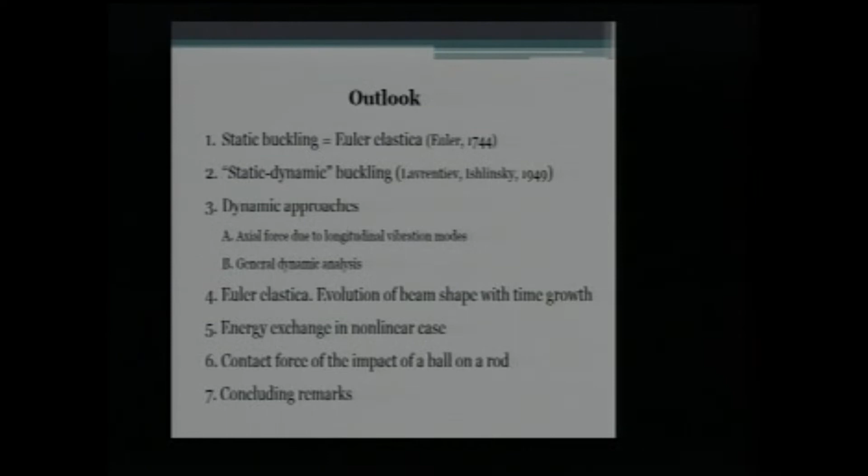I will begin with a classical problem, just to say a few words about the static buckling. Then I will come to the dynamic problem - first of all, the so-called semi-dynamic buckling or static dynamic buckling, and then I will suggest a number of dynamic approaches. What I'm going to report is just a classical, theoretical problem, without any practical application.

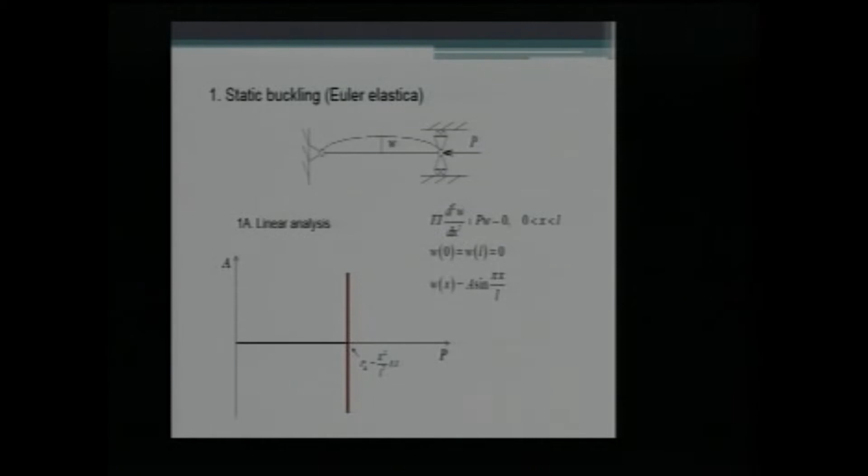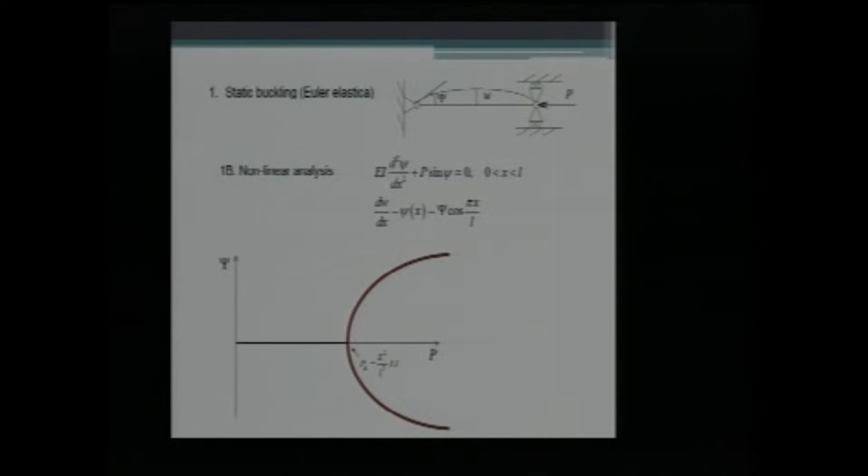This statical problem is well known, I think, to everybody. In the framework of the linear analysis, we have such a boundary value problem, and the solution has such a form, and the amplitude can be any amplitude - a shortcoming of this approach. The nonlinear approach is much more realistic, because at least for each axial force, considering a simply supported beam, we will have the amplitude and the buckling shape.

Also well known is the problem of the pre-curved rod, where W0 means an initial curvature, and we will have topologically another stable branches, but nevertheless everything is well known here.

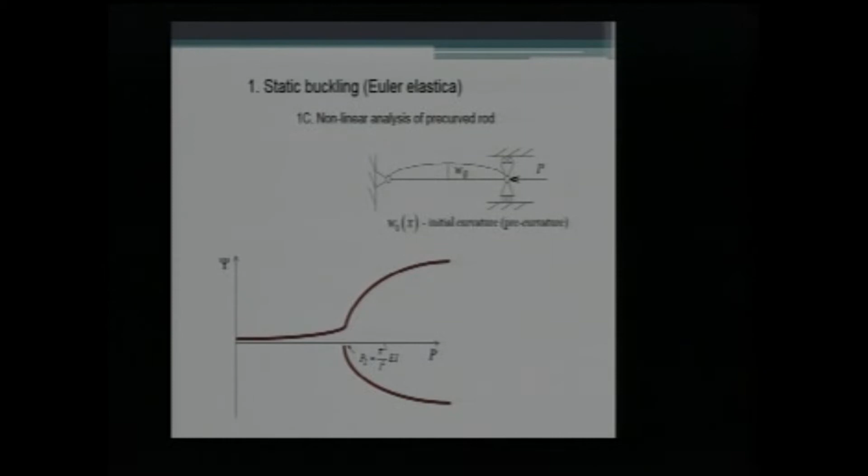What is probably less known is the attempt made in the late 40s by two members of the Russian Academy of Sciences, Lavrentiev and Ishlinsky, who suggested the so-called static dynamic buckling of the pre-curved rod. The rod is pre-curved, and the idea is the force is suddenly applied, and we keep this force - this axial force is the same in all cross sections, which is typical for statics. We apply the static force in axial direction, then study the dynamic motion of this rod in the transverse direction.

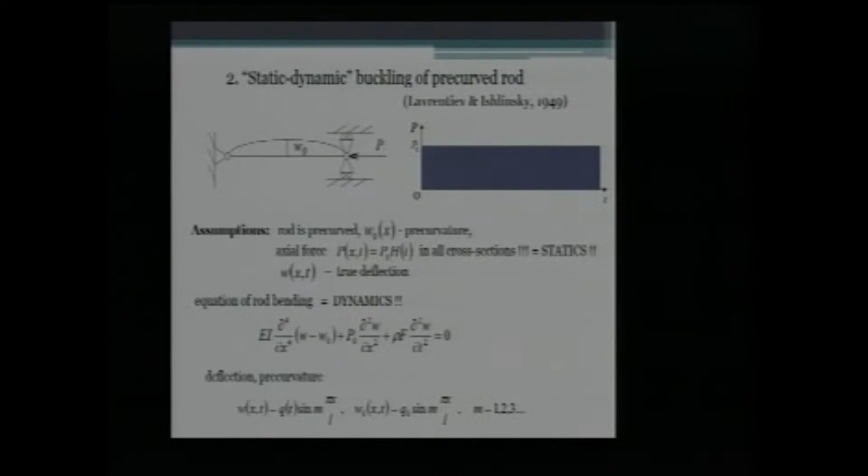So it's static in axial direction and dynamic in transverse direction. If we consider the vibration mode or buckling mode number M, and the deflection solution also in shape number M, then instead of the partial differential equation we will have an ordinary differential equation. If we introduce this lambda, and if lambda is a real value, then we will have two exponential functions, and this function describes the unbounded solution.

There is a number of buckling shapes or vibrations - number 1, number 2, number 3, and so on. Among all these eigenvalues, there is one which is maximum - the maximum eigenvalue. This maximum eigenvalue describes the solution which increases with a maximal instability rate. If we calculate this derivative and determine the maximum of this lambda, we obtain the result that m and n don't coincide. It means if we apply the critical force, the Euler critical force number n, then not the n buckling shape will have the maximum rate, but another buckling shape, number m.

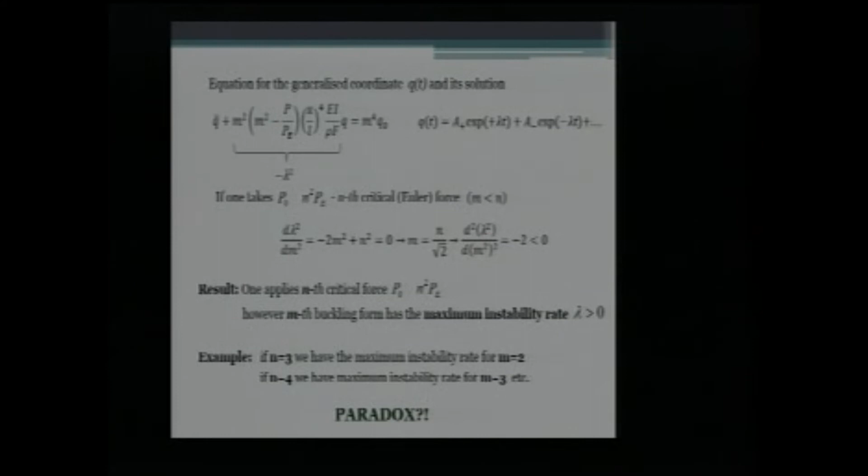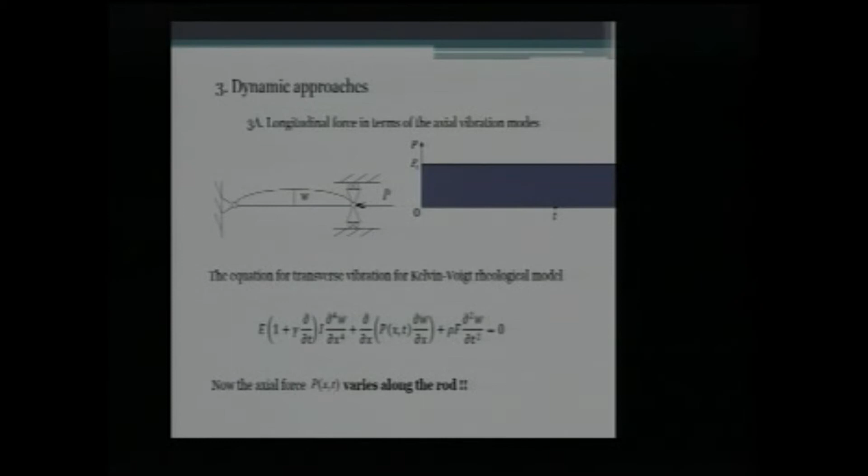So the first step is quite reasonable: to consider the dynamics not only in transverse direction, but also in axial direction. Everybody understands that the wave will propagate in the axial direction, but we applied the Kelvin-Voigt rheological model to take into account the damping. This axial force depends not only on position, but also on time. We will not use the approach of wave propagation, but can expand the solution in terms of the axial vibration mode because of the dual possibility.

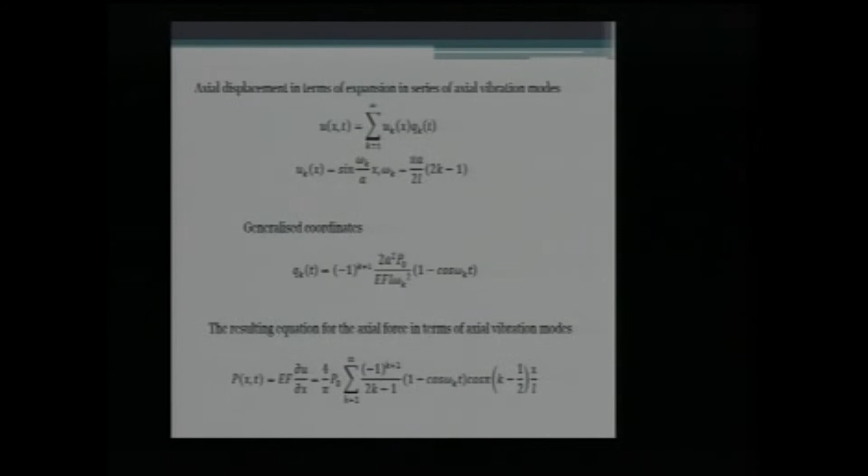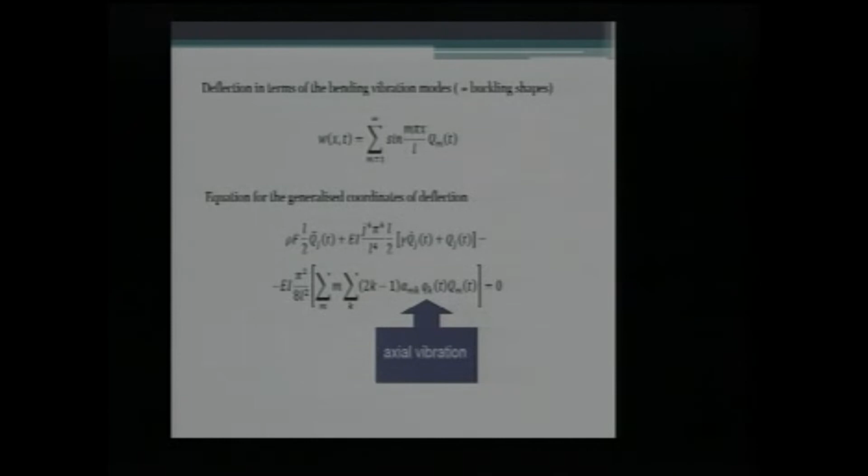It's a very simple problem, easily solved, and we obtain the axial force, which of course will depend on time - it will be a number of harmonic motions. Then we substitute, looking for the solution in terms of the bending mode, also instability shape, and we obtain the generalized ordinary differential equation for the generalized coordinates. The very fact that we have generalized coordinates for the axial vibration leads to this ordinary differential equation, and here you can see the term which is time dependent - namely the periodic or harmonic motion.

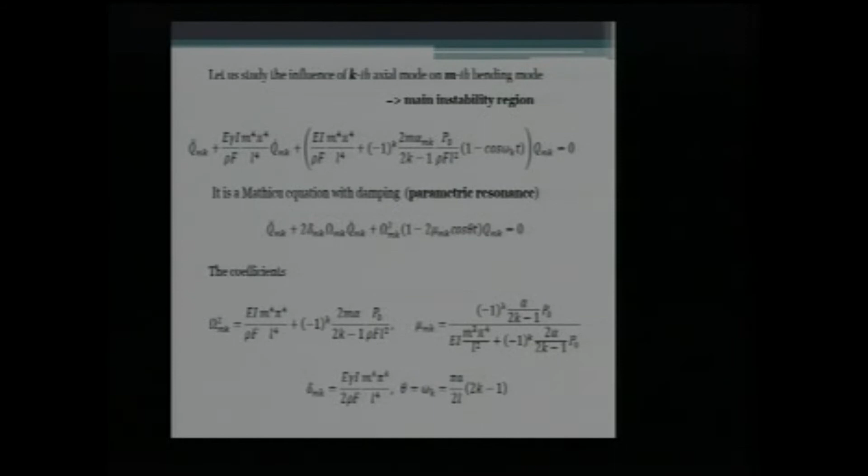So it's a kind of Mathieu equation, and if we consider just the main instability region - because there is a mixture of all these parameters, and all these coefficients are presented here, for example in these eigenfrequencies there is a part from bending and also a part from the axial force - it can be easily solved, and we obtain the instability region. But the result is disappointing, I would say. For example, we see that the first longitudinal mode excites just the instability region number 12 of the bending instability, which is certainly not realistic.

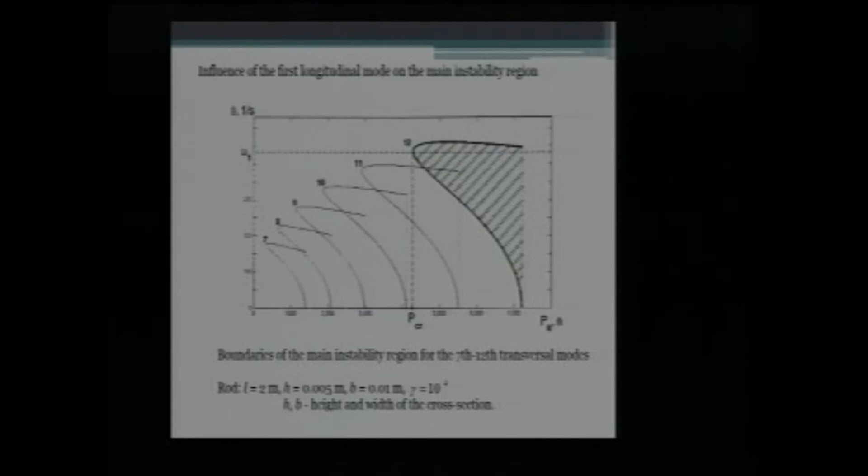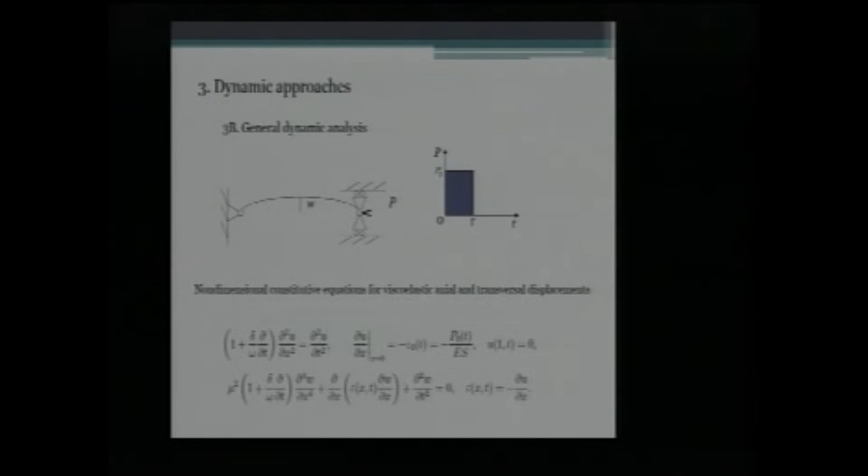With this in view, we make the next step and consider the general analysis. We assume this axial force acts for just a finite time duration, and the solution - I will skip all these calculations, but the final result you can see here. The solution looks like this.

This alpha m actually describes, as you see, corresponds to the buckling shape number m, and this is responsible for the instability. A number of these exponential functions are excited: number 1, number 2, number 3, number 4.

For example, if we take the fourth Euler force, Euler load, critical load, you can see we will have such a line. Generally speaking, the first, the second, and even the fourth will be excited, but shape number 3 has a maximum instability rate because it corresponds to the maximum value of this alpha.

It's a paradoxical situation probably, but you see, if we move slightly to the right, then we will deal with number 4, and if we move to the left, then the second will be prevailing, let's say, in such a way.

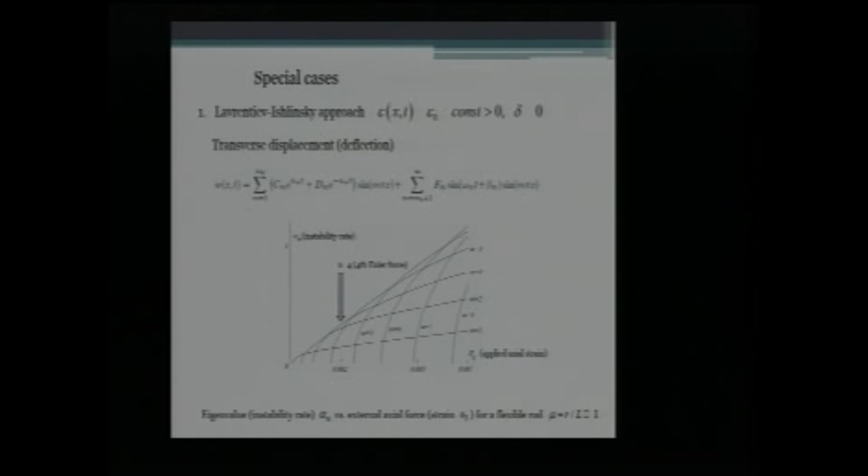So it's the next calculation - let me also skip this calculation. If we obtain the complete picture, what I mean by complete is that it will be some curves which correspond to the exponential instability and also some parametric instability.

So you will see that the amplitude growth, or instability rate, whatever you like, at the Euler bifurcation is always greater than growth at the parametric resonance because they are lower in this picture. So parametric resonance is probably not so dangerous.

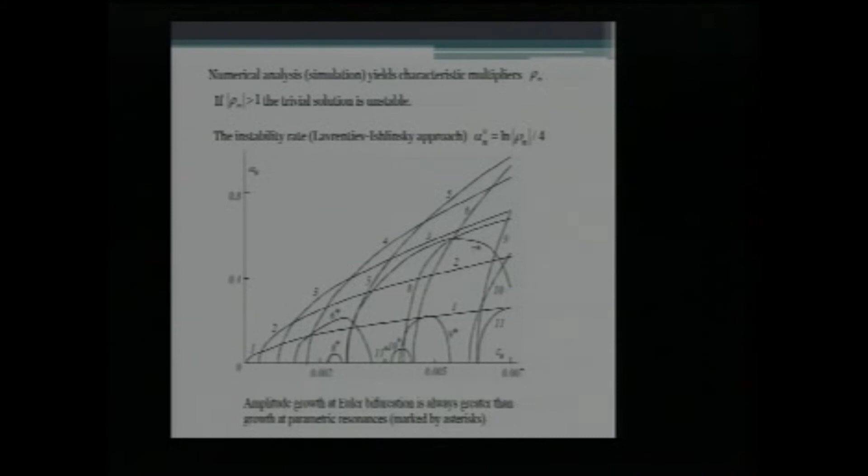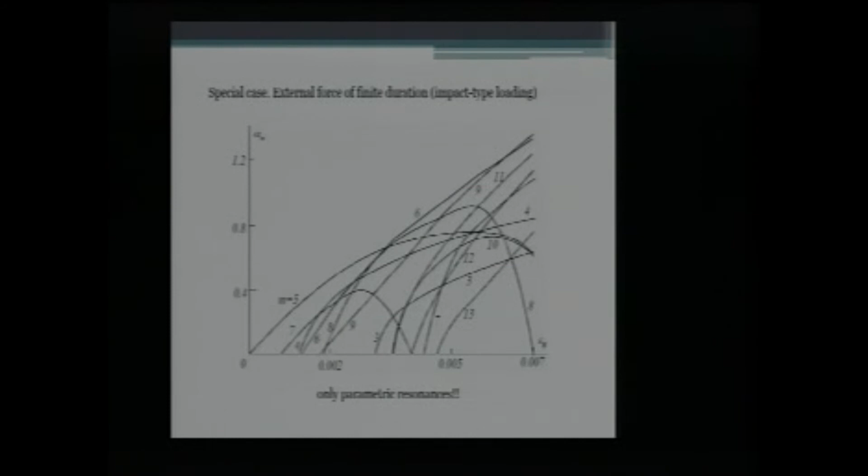However, if we consider only parametric resonance, and also the combination resonance, you will have plenty of opportunities. This shows how difficult this problem is because the number of parameters comes into play.

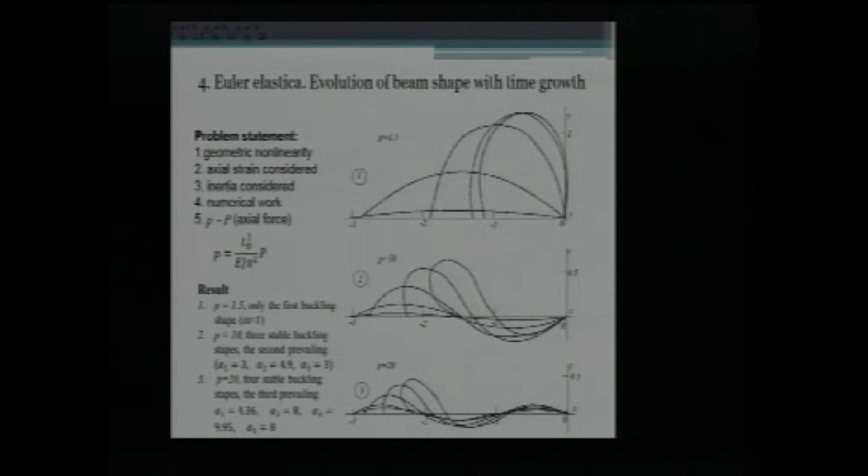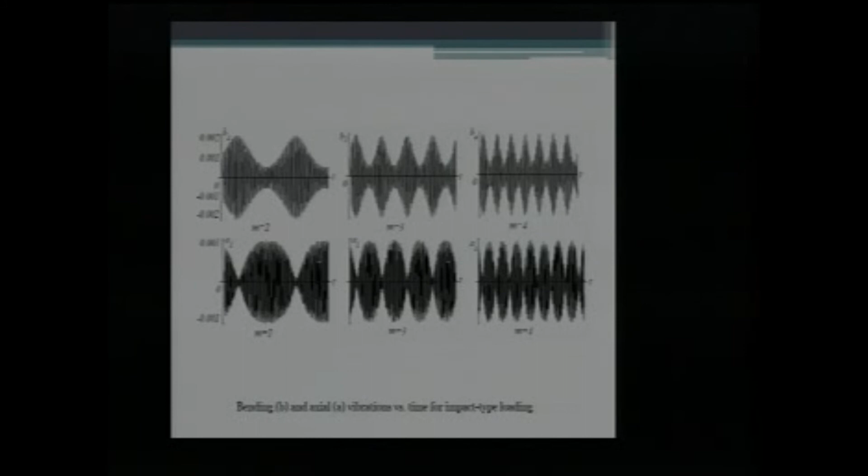In the case of 20, it corresponds to the fourth instability, fourth critical load. Now we will have, so to say, the presenting - of course all these are presented, but the calculation demonstrates. I have no time to explain the energy exchange; it's just calculated, but I cannot draw any conclusion from these pictures.

Just a few words about the determination of the contact force, because such a rectangular load is hardly possible to realize, not feasible - more realistic is just to use some impactor. We can calculate it in a semi-analytical way by means of the displacement due to wave motion plus some local deformation by means of the Hertz law.

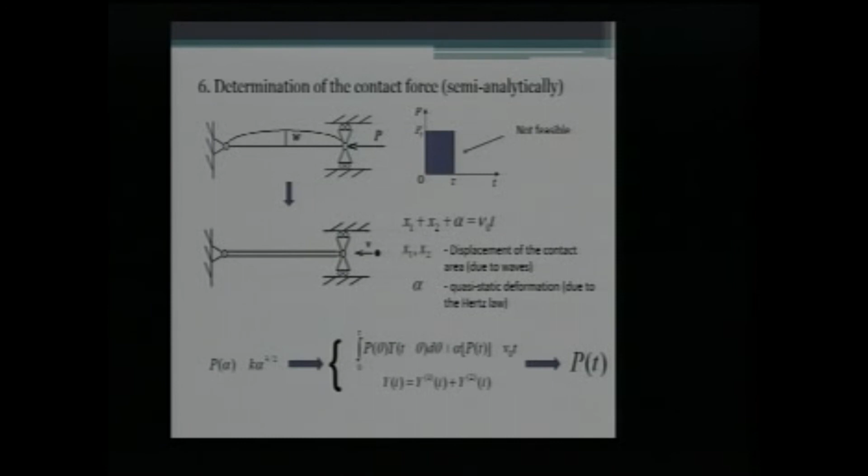But finally we will have a nonlinear integral equation and calculate this force, and we can also do it numerically. Just to compare these results, they're very close for the rectangular cross-section, and surprisingly they differ considerably for the circular cross-section. But anyway, we can calculate it, and we are going to do the same study for this loading force.

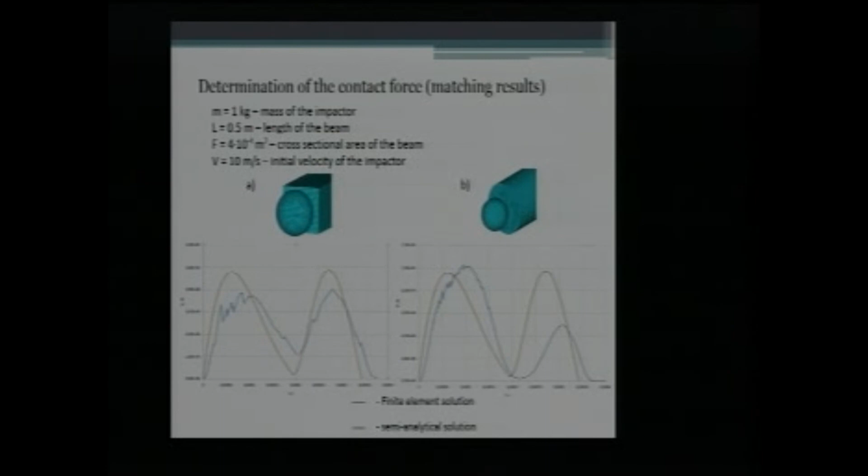Okay, and actually that's what I'm going to report. I would like to say that the problem demonstrates a very rich dynamics, which should be studied carefully. Thank you very much for your attention.